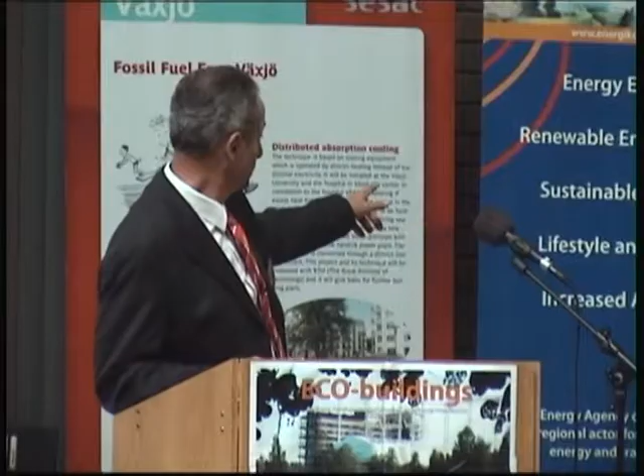The main tasks are energy efficiency and promoting renewables as much as we can. At the moment we are dealing with 3 main areas, which you can see on the roll up over here, and these fit very much into what we have said earlier today.

It's buildings, of course, that is energy efficiency and also renewable energies to support that building, but also transportation and mobility management. The third is about lifestyle and learning, as we say, making awareness a big issue in different kinds of projects.

We are 22 people at the moment, and I don't have a map, but it's in the southeast corner of Sweden where we have our area.

You can see our homepage address there, where you can read a little bit more. There's one section in English as well. We used to have one newsletter 2 or 3 times every half year, not in English though, but in Swedish, and you can read a little bit more on our homepage.

What we're going to talk about these days is eco buildings, and by that we mean energy efficient buildings, as we said earlier. The big question is, of course, how to achieve this goal, to make our buildings, both the existing ones and the new buildings that will come, as Mayor Johnson just told us. That is the question. How to do that?

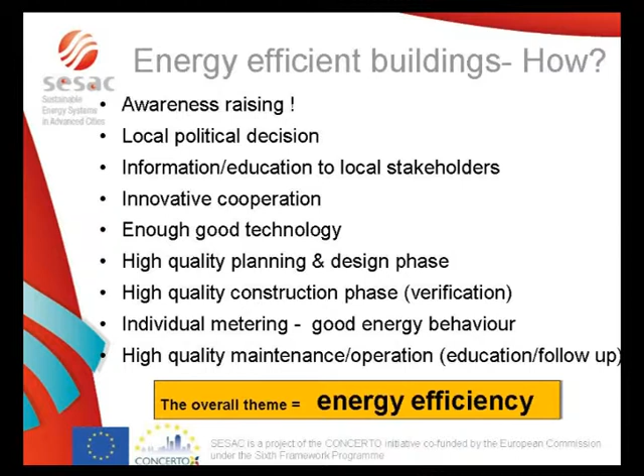It's about planning, the design phase, and you can see it's about the construction phase, of course, at site. It's about using this building when it's built. It's about metering what is used and so on, and being pedagogic to all those people that are using this house.

And of course it's about maintenance and operation during all the life cycle. I will now go through all these points here, which is the result of the SESAC project actually.

And what is more here, it's about this: the overall theme through all this must be the energy efficiency question. You need to start with that up front, and you need to stick to that all the way, otherwise it won't work actually.

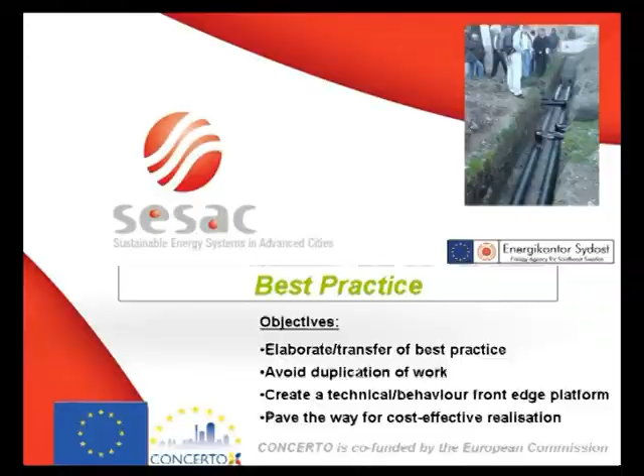In SESAC, we have been working with a work package, we call it, and the name is best practice. The objectives for this work package is what you see here: to elaborate and transfer this best practice information.

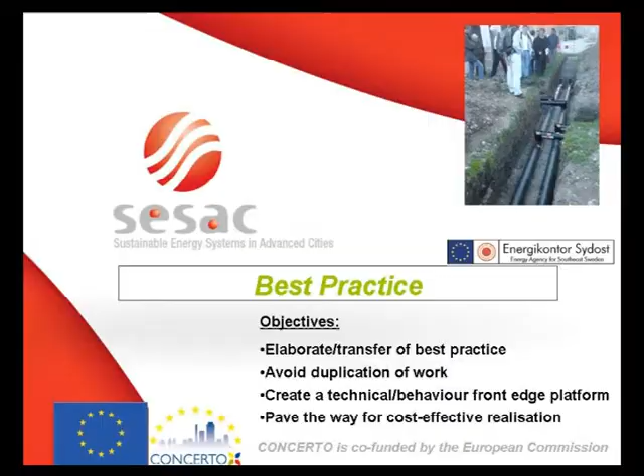Of course, avoid duplication of work, create this technical and behavior front edge platform, but also pave the way for cost-effective realization. There's a lot of work that needs to be done a long time before you start to dig in the ground.

This is one of the first things to observe, not only in SESAC, but of course everywhere where you're going to do this.

This picture was created, I think, 3-4 years ago, when we just had started this cooperation with our friends in Holland and in France, because after half a year, we realized that we had different kinds of thinking about this. We needed to do some structural thinking and come together to a final version of what we're going to do. So this plan was made, and I will try to explain that to you. It's a little complex, but nevertheless.

Up here we have the task to be done: to build eco-buildings. These eco-buildings would be monitored afterwards, and the result would be very visible. We knew that from the beginning. We also knew what kind of restrictions were set by the European Union. We needed to reach a level about 30 to 40% beneath the national building code at that time. So that was a high restriction. We knew this, and we started to do this coordination.

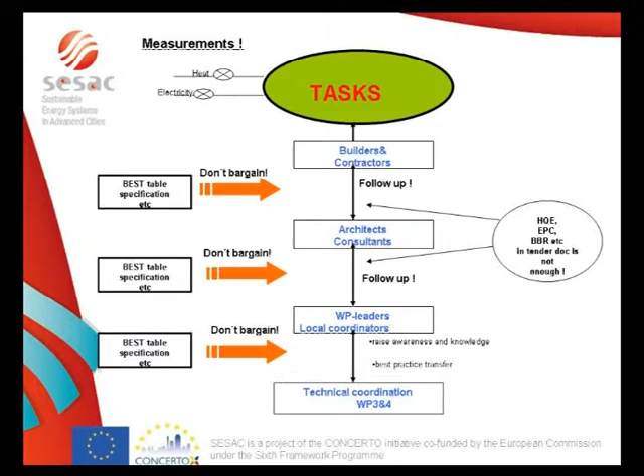One other experience from this work is that it is very easy to write in a contract that we want a building that complies with the national building code minus 30%, full stop. It's very easy to write that in one sentence, but we must be very clear - that is not enough, by far not enough. It takes a lot more than that, because this is a long journey to travel in order to reach the goal expected. Simply writing in a tender document that we would like this house minus 30% is not applicable. I hope you understand that. That is not sufficient - it doesn't work.

We have experienced, in order to address this, that we needed a work program. What we did in this project was the following.

We made some activities, including quite many pre-meetings in each of the 3 leading cities, where we continuously, twice a year, talked about these things before and in the beginning of the planning process. It's very important to say this was done very early in the process, to highlight these questions.

We were also very clear from the technical coordination side to give feedback on these meetings and follow up. You can still find them on the homepage of our project, where people can go back afterwards to read and understand why.

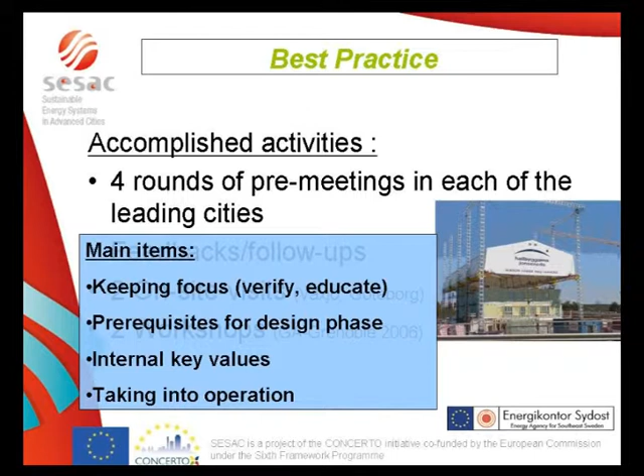Keeping focus, that is to verify all these steps and to educate and inform people continuously. As I said before, there are quite a lot of people involved, so this is a task that should be planned.

This needs to be planned in advance. And of course this is a very important thing to understand, that you need to be very clear about the prerequisites for the design phase, to tell very clearly what is expected, to have requests.

We also founded some internal key values in order to be able to verify that things were going on as we expected. We found some key values that were internal in the project.

And we also talked quite a lot about this crucial phase. Starting up and all these things is crucial, but it's also crucial to take into operation, to maintain focus over the taking-into-operation phase, and to verify that things are working like you expected.

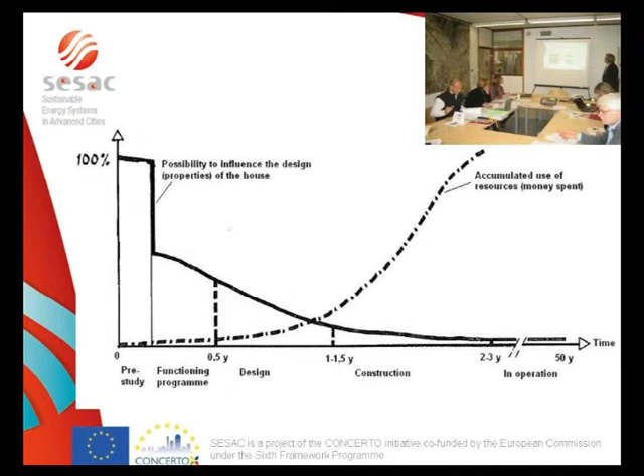Finally, after some work, we found some, as we say, fruitful steps — the result of our joint ambitions and joint work in the project, in order to be able to fulfill the requirements. It could be more than six, of course, and this is individual, but the main items are here, I think.

It's about having a start-up meeting in the beginning for the ones who are engaged at the very start, to make them understand what the task is really about. Different kinds of stakeholders should be involved. And then the next thing is calculate.

We have lots of good computers, lots of good software programs, lots of knowledge, but the fact is that we calculate too little in advance. We stress this point: the calculation and the possibility to change different properties when calculating is an instrument that should be used very much more.

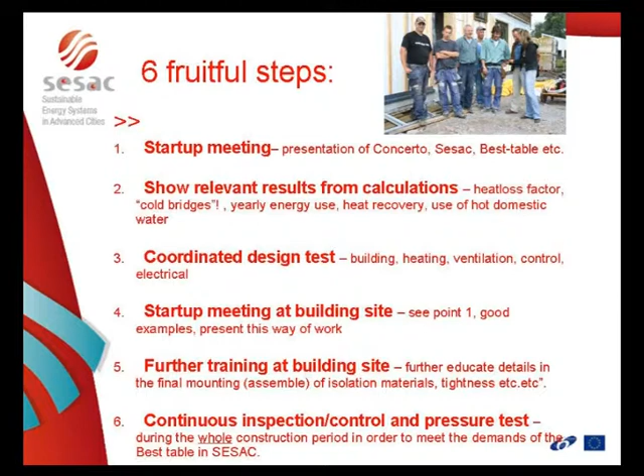Then we had a discussion about coordinated design tests and the startup meeting at the building site. It's also a crucial thing, because the people at the building site are those who are finally deciding the quality of the building. If people at the building site are not aware of the work being done before and what the goal is, we will not succeed in these matters. That's for sure. So this program is also quite a lot about educating and informing people at the building site about what this is all about.

And even further training at the building site, because it's a long process. And finally, here, this is verification - trying to verify what has been decided earlier, what has been calculated earlier. You need to verify that on site. And that must be done during the whole construction time or period.

This was just an introduction to our work about best practices in SESAC, and I have mentioned the most important things here. During the afternoon now, after lunch, we will hear from each of the speakers how they have adopted this thinking, and we can have further discussion on this.

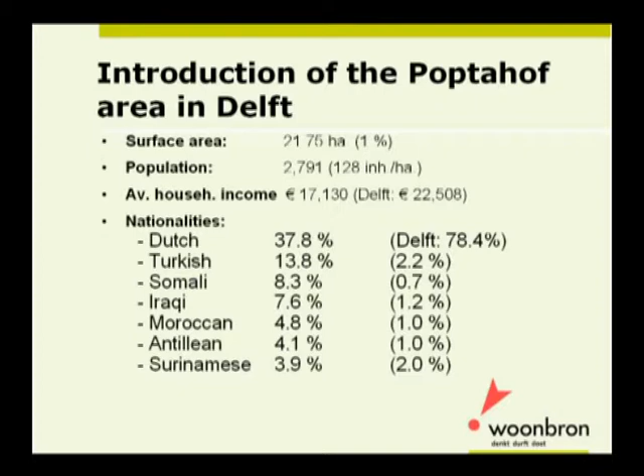If you look at a list like that, you would think, well, I must go for dinner over there, there's a lot to eat. But if you look closer, you can see it's not so friendly and not so welcoming. It's really one of the areas that needs working on in Delft.

There's a couple of challenges for the housing association. They wanted the entire neighborhood to redevelop, but we don't have space in Delft, or in the Netherlands in general, to put everybody out, clean up the area, and then put everybody back in again. We have to do it step by step.

There's an emphasis in the total project on social livability, which is more important than the energy efficiency we're talking about today. They want the people to remain living there, to stay healthy or become healthy, and to understand that Woonbron is taking care of the area it possesses. There's also attention for water, energy, traffic, and waste.

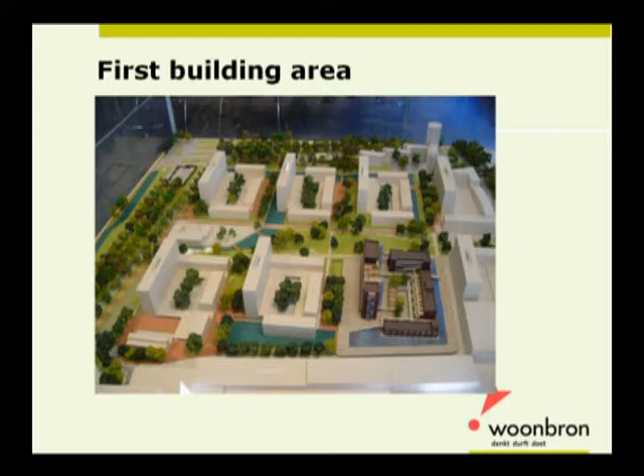He gets born in 2007, and he's only 10 years old in the year 2017, and all he has experienced is work in his area. So they decided, in another European project, to build the park first.

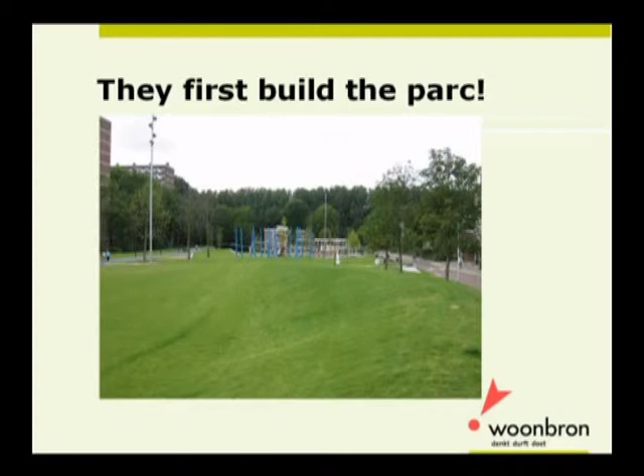So this total redevelopment of the area started with a park, which, when you're looking at the budgets, is quite a hard way to begin because there's no money coming back from building a park. But they built the park first to make sure the children could play there. Those are the kind of investments they make when they set strategic themes to keep their areas healthy and robust.

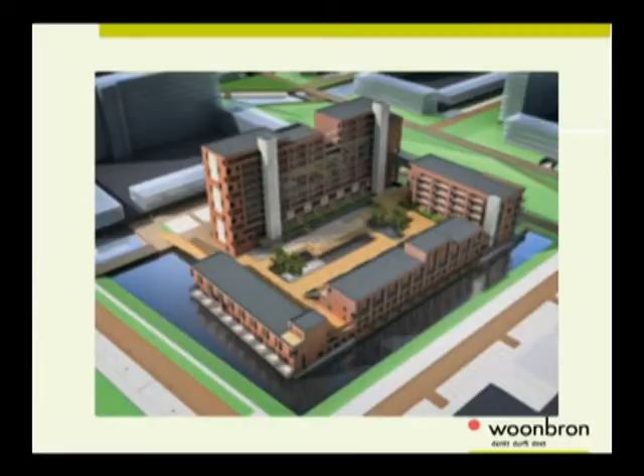This is the first field. The taller building is a refurbishment, the smaller ones are new, and the area in between is also the parking lot. It's raised, and the cars are underneath.

As an energy consultant, you need a scheme, of course. When we started with this program, the SESAC program is 4.5 years old now, but the writing of the program must have started about 6 or 7 years ago. We got the SESAC measures from Stefan and a guy called Manuel Swart, who you'll see tomorrow I think, and these fitted the Dutch national regulation called EPC. We had to do the quality checks that Stefan talked about before lunch, and then we concluded, okay, we can build this.

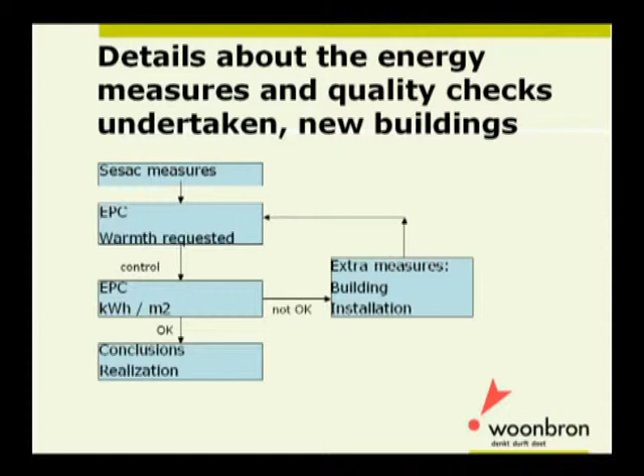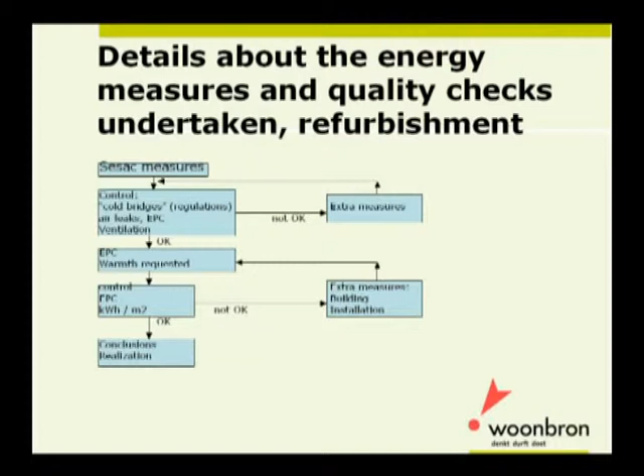In the refurbishment, the measures proposed in the SESAC proposal were just about the level of energy efficiency needed for a new building in the Netherlands at that time of writing. So we were going to refurbish, but aim for energy standards as if it were a new building. We had to do some extra checks in refurbishment because nothing is straight—everything is different from what you expect. That's what I'm going to talk about now.

Before lunch, Stefan Olsson from the energy agency of this area told us about the checks you need to do on site when building. You cannot just demand 30% extra energy efficiency—you have to make sure it really happens and isn't only designed, but that the carpenters and builders actually do their work. He's been talking to us about this for the last 5 years, I think, Stefan.

So we decided to make a quality control system positioned between the builders and the developer. The way we're doing this project, the housing association says what it wants, the developer says okay I will do it, and the builders obviously build the building. So we had to put this quality control in between the builders and the development company.

There's an on-site test for insulation with an infrared camera, which isn't as expensive as it was 20 years ago. We build a test apartment, heat it up, and take pictures to see if there are any cold bridges or leaks, then continue to the next apartment. This, of course, has to be done by an objective expert, because you don't want fighting between the builders and the developer about the quality of the checks.

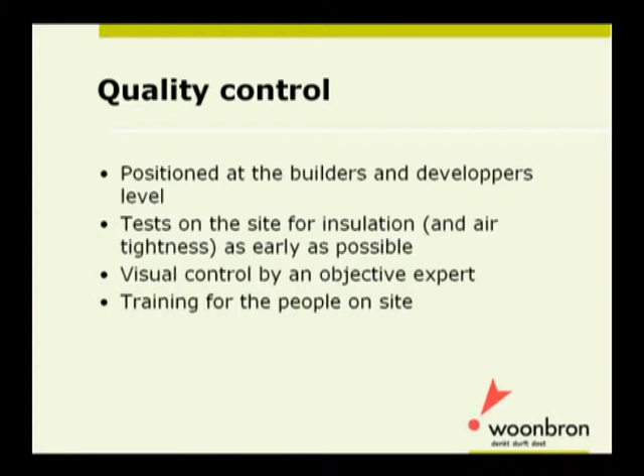You have to train people on site. One of the good things we noticed is that the builders are actually very happy to have a program like this, because they're professionals like you all are, and they're keen on developing their work. So it's not considered a pain, but rather an opportunity to fix some of the difficult problems you run into, especially in a refurbishment situation.

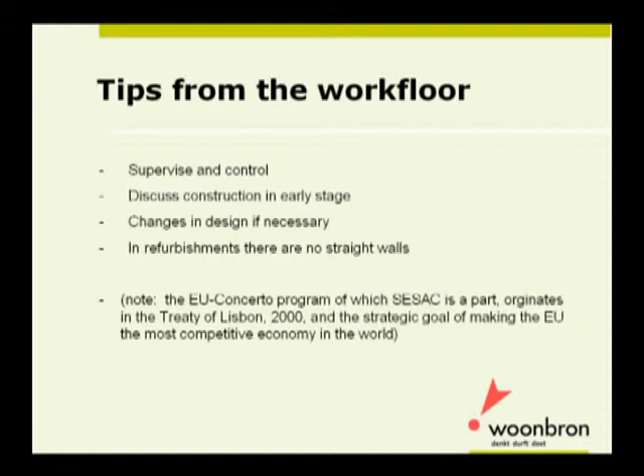The last one is the most important. In refurbishment, there are no straight walls. So things may look very good at the architect's office and on the drawings, but when the guy has to put insulation around a corner that isn't a 90-degree corner, he has to fix it and solve it himself. That's the moment you must make sure he pays attention to the detail, that he's given time to pay attention to that detail, and that it's also told to somebody else for the next corner, so that guy doesn't waste the same amount of time again.

Every once in a while I do this presentation for students in Dutch, so it's a bit more fluent then.

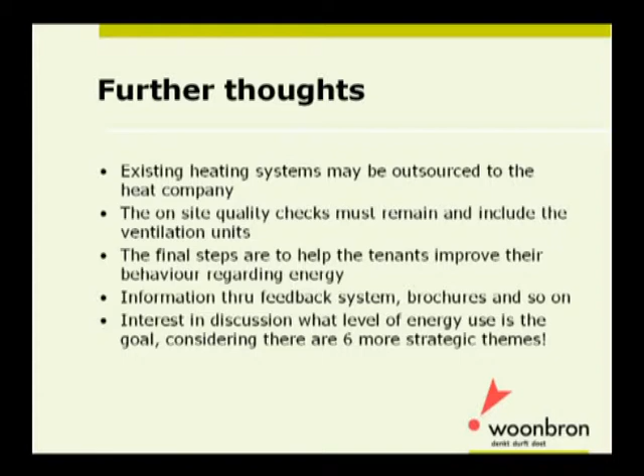We are now working on a feedback system for the tenants. We feel that we have developed a good building. We have checked to see if the building was nice or built to the quality asked, and we are now in the last step where the tenants come in, and we need to help them change their behavior and use the building in the way we feel is best.

So, from an energetic point of view, we're going to give them a brochure on what to do with the windows and the technical stuff, but we are also going to supply them with a feedback system to tell them how much energy they are using at the moment, and to help them set their standards.

We're very interested in the discussion planned for tomorrow about how far you should go. For example, do you want to make a passive building? Is 30% energy efficiency good enough? Or should we go for 60%, and at what cost, especially compared to the other strategic themes we started with? It's not like they have nothing to do except energy efficiency—they have a lot to do, and energy efficiency is part of that.

Well, I think I've been way too fast, Stefan. Yes, that's correct.

Can you tell a little bit more about this cooperation with HTC and these special shares? Are you going to use heat from the sun?